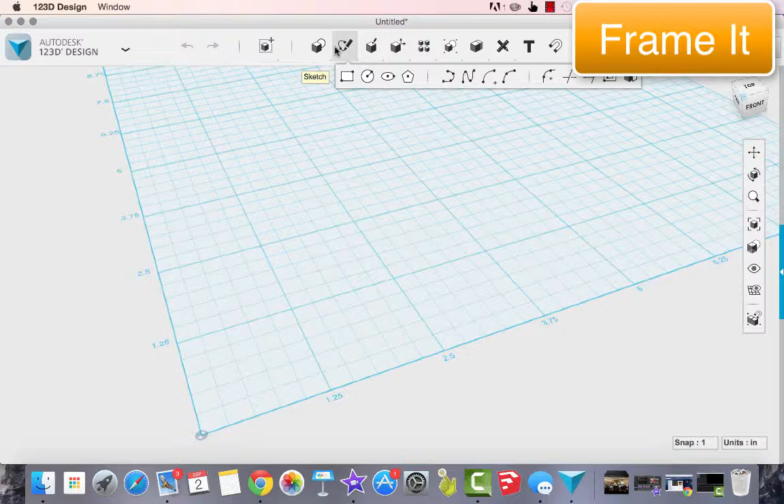So we want a 3.5" by 5" picture frame. We need a 3.5" by 5" picture. There we go. And not only that, but we need the exterior part of the frame.

So to do that, we've got the sketch rectangle, and I'll go a little bit wider than the picture itself. I'm going to go 2 unit squares off of here, so it's going to be a 4.5" by 6" frame.

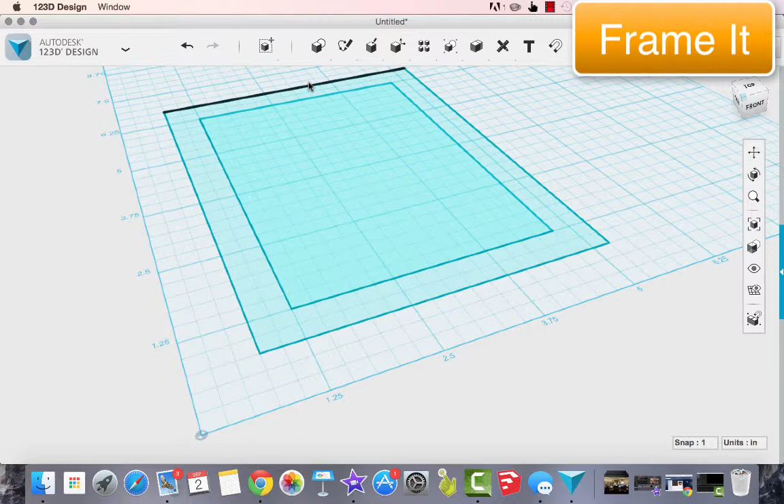Okay, so taking a look here, we've got that, and we've got our picture, we've got the frame.

Instead of 2 dimensions, let's go ahead and make this 3. I'll take this, and it's going to go up 0.75 inches.

Actually, it's pretty thick. Let's go ahead and go down to a 1/2 inch. So we're going to go 1/2 inch on the frame.

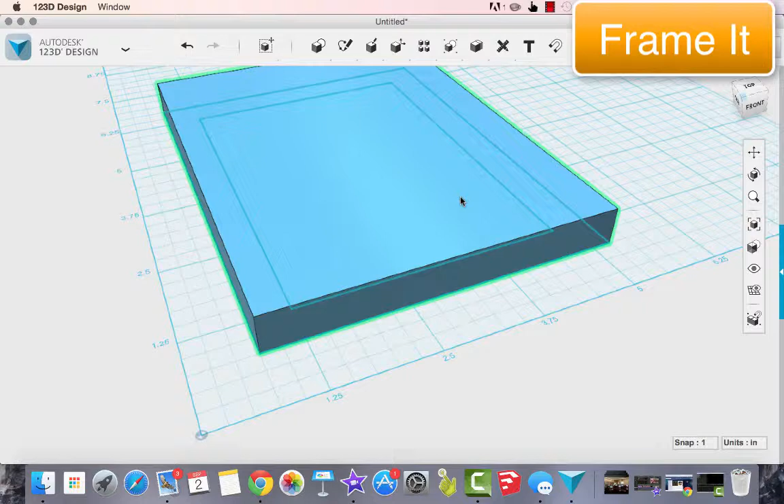And now I need to be able to make this an actual picture frame. Right now it's just a block that I can't do much with.

So I'm going to flip it underneath, and I'm actually going to give myself some cutout. What I mean by that is the picture frame needs something to rest on, so there's a little inlet that I'm going to create.

That's going to be a 1/10 inch by 3.5. A 1/10 inch by 4.9, since I've already taken off a 1/10 inch.

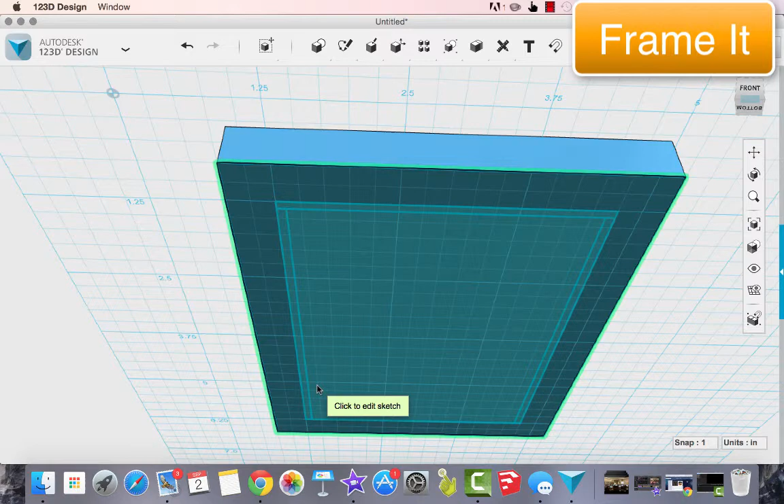And I'll do that all the way around here. 1/10 inch by 4.9, and there we go.

1/10 inch by 3.3, since I've taken off a 1/10 inch on each of the sides. There are multiple ways that you can do this, but this is how I'm choosing to.

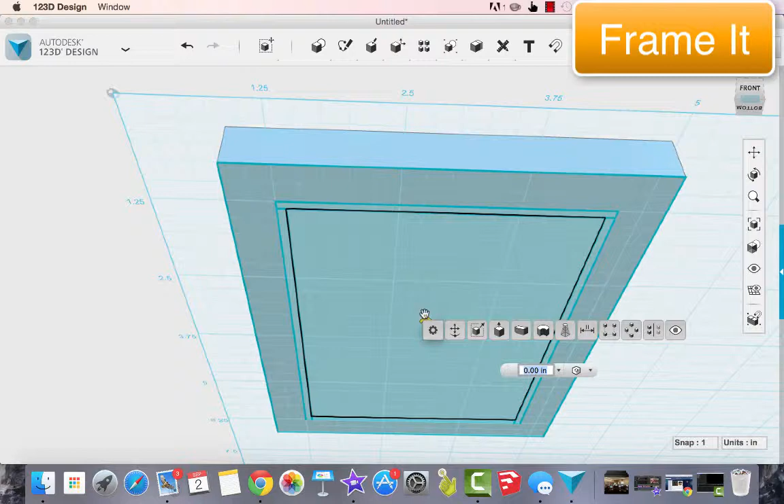Okay, all right, so it's ready to go, and I need to make sure that I select it carefully and extrude. So I'm going to extrude this all of the 1/2 inch, so it cuts it all the way out. Okay, and no more interior.

Okay, now the problem with that is that there is also no way of resting the picture.

So to do that, we can extrude those pieces that we had created, and I'm going to extrude them 0.2 inch.

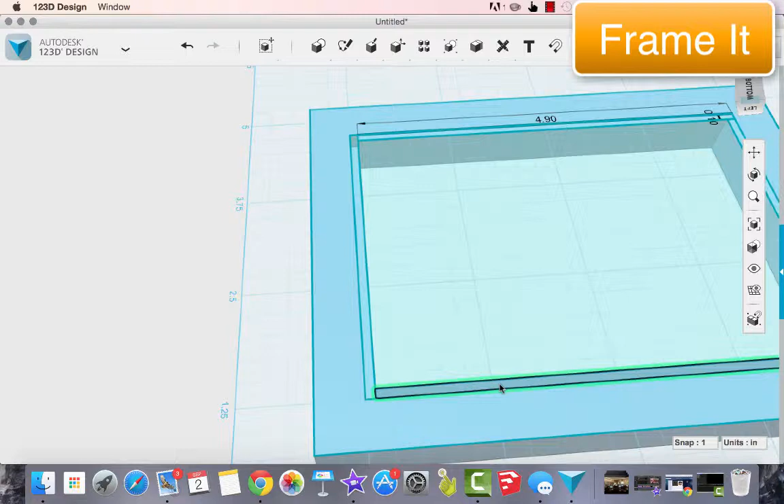And it's going to be a little bit challenging, but you can take it and move it down 0.2 inch. Notice that that red there is showing up, that means that we're cutting away instead of building up.

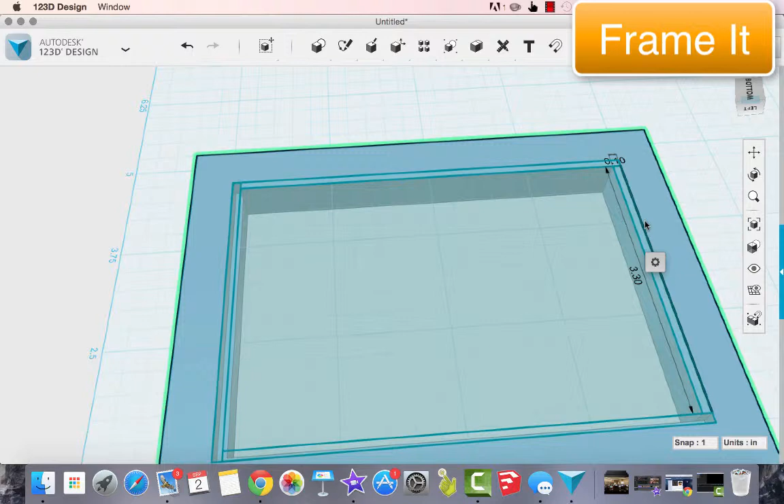There we go. Bring this down 0.2. Now if you take too much away, it's going to sit in too deep, and you'll have a lot of wiggle room. I found that 0.2 inch is sufficient.

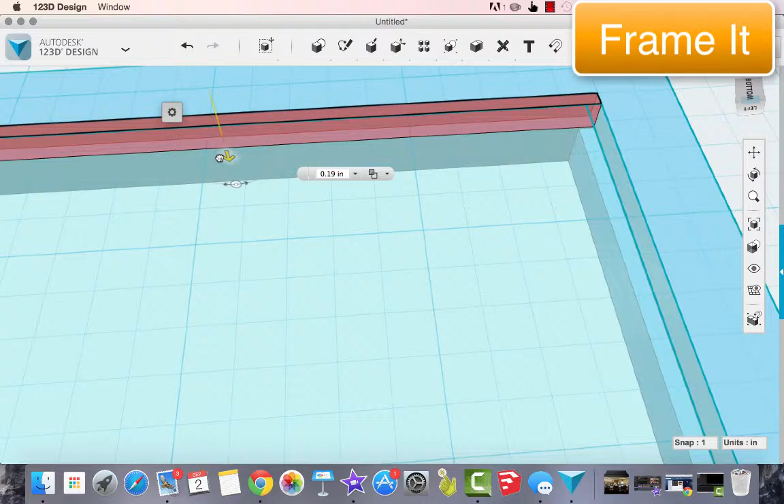There we go. Then I'm going to delete all of the extra pieces. I don't really need these anymore.

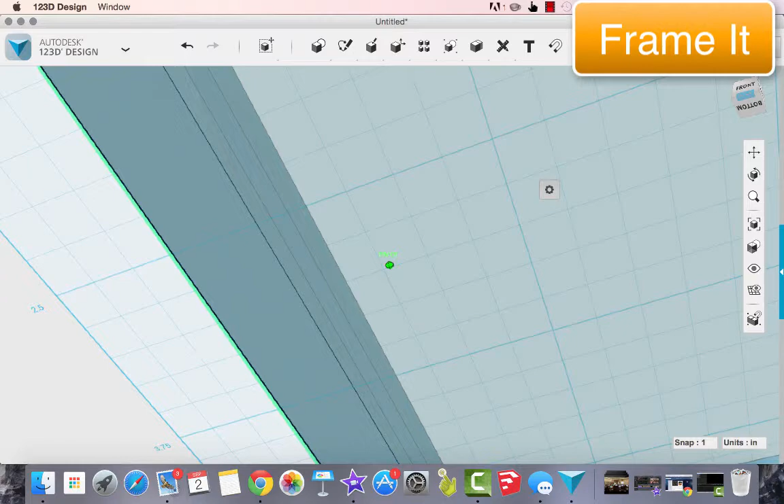Okay, so looking at it here, we've got a picture frame. So deleting out all the scraps, take a look, very basic, but a picture frame no less.

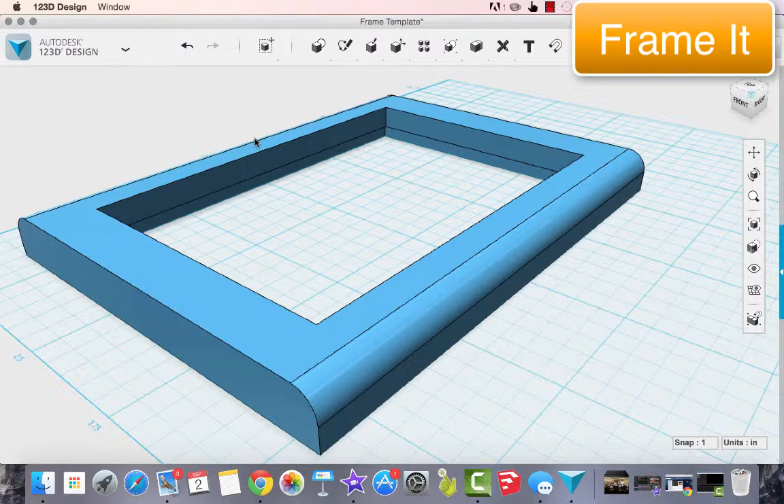All the way around, hopefully. Sometimes Autodesk can be a little bit finicky.

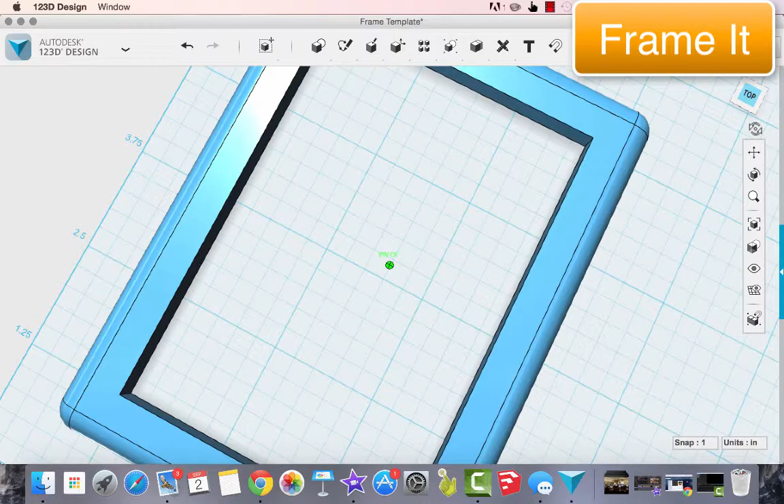So now looking at it here, I've got a picture frame. Remember that we want to create a unique frame. This is pretty basic, pretty bland as it is right now.

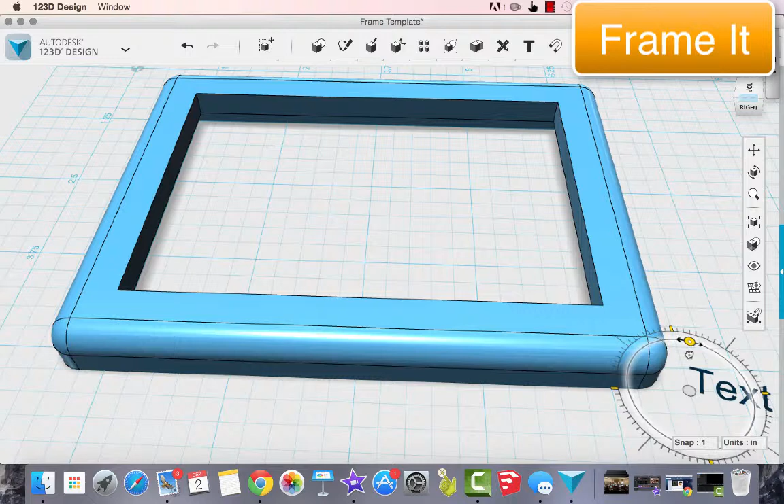So to add some flair to it, we can add text. This is probably one of my favorite parts of this. I'm going to click on the text button, and I'm going to start at the very bottom here, and you'll see why. I'll zoom over so that you can see it, and I'll hover over top of the edit text here and change it.

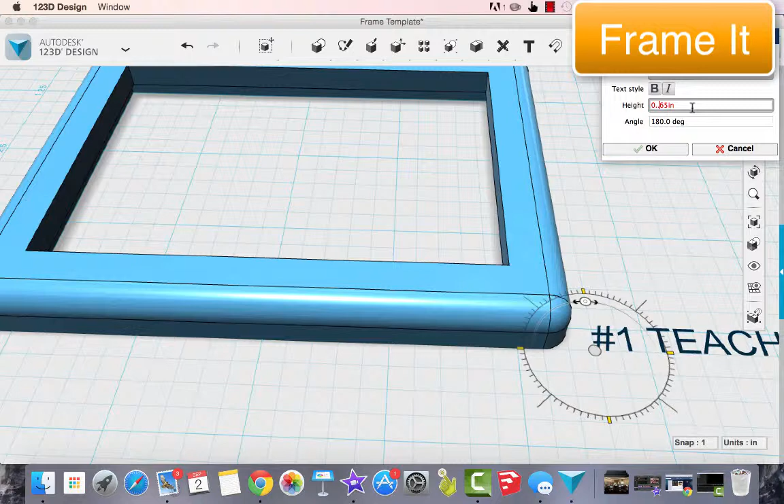Got some text there. We can change the height of this. Make it bold. Change the font.

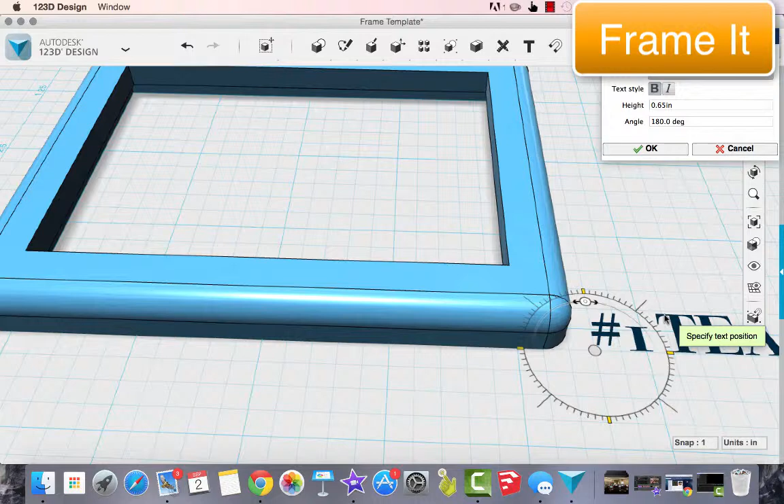Notice that if you choose some of the fonts that show up as rectangles, what that means is that it's not supported. What you want also is something that is going to be thick for a nice solid print. Like this right here has a pretty thin line. It'll print, but it's not going to be very sturdy.

Something like this here. So Cambria is nice. If I go ahead and click on OK, and now we're going to...

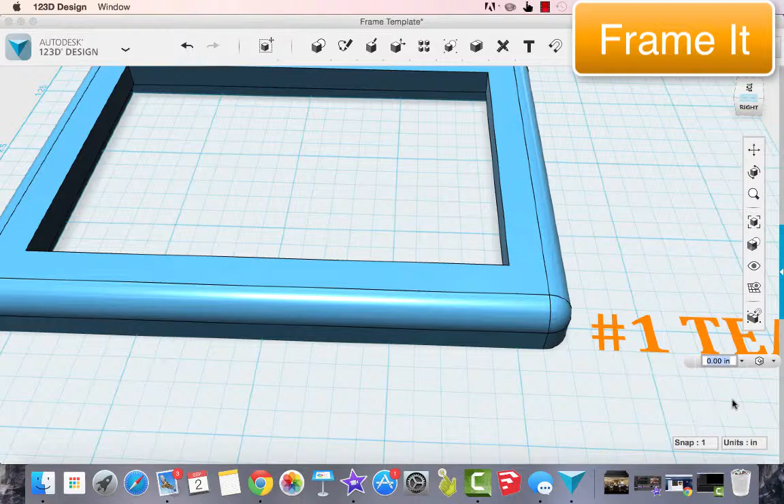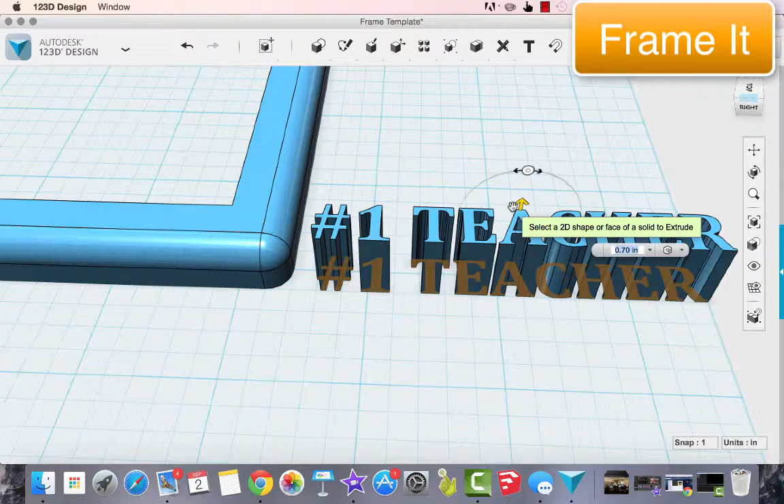Extrude the text. Let me move this over a little bit so you can see it. We're going to extrude it up. Remember that we went up a half inch, so we want to be able to have some extrusion above this. So I'm going to go up 2/10 of an inch above the frame.

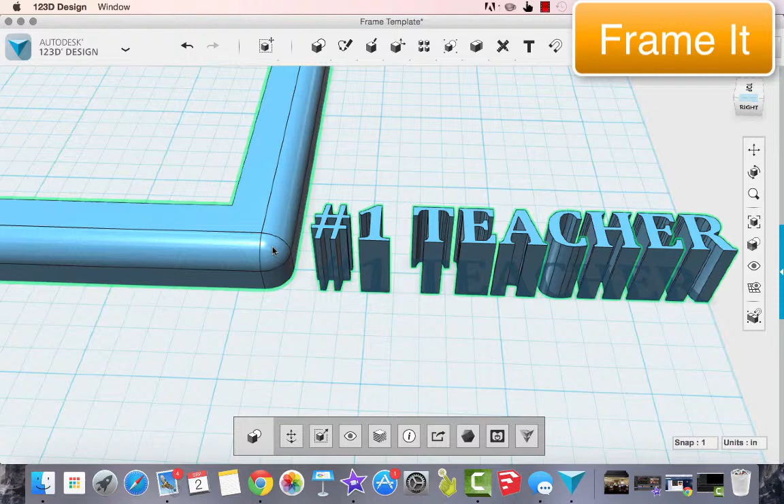And now each one of these is its own piece. So I need to hold down, on a Mac you hold down the command, on a PC or a Chromebook you're going to hold down the control. I'm going to select each one of these, and now it's time to move them.

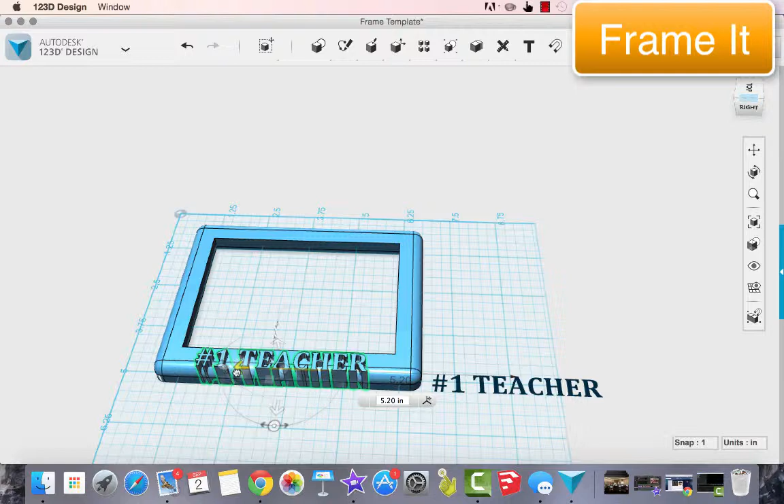I'm setting it up here so that it makes it easy to move. Take a look here. This is where I want it. I can mess around with it a little bit. I actually want it up, so I'll take it and move it up.

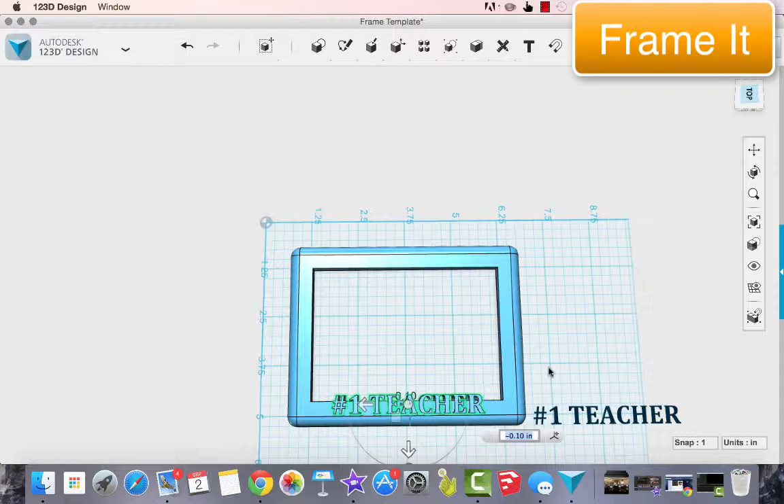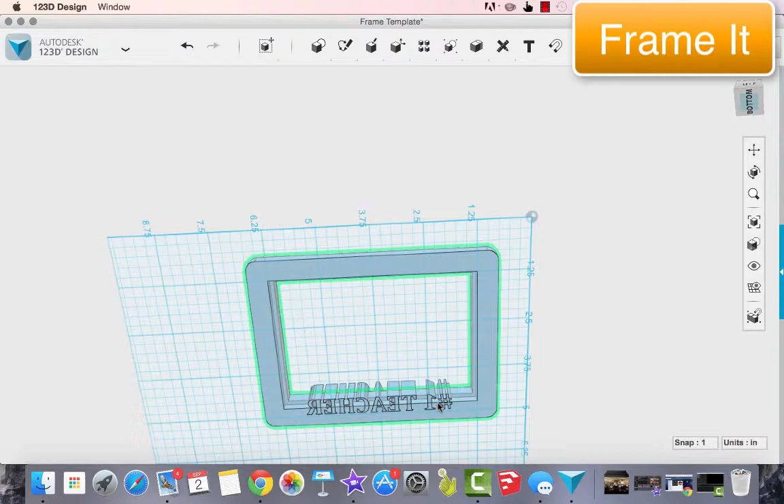Delete out the text that we originally put in there. And some would say, cool, we're done. Well, actually we're not, because what we just did was we added a bunch of text to a frame that's all in 3 dimensions. If you look at the bottom of the frame, it's sticking out, and so you're not going to be able to put a picture in there because you have text in the way. One trick to avoid that is by deleting it out.

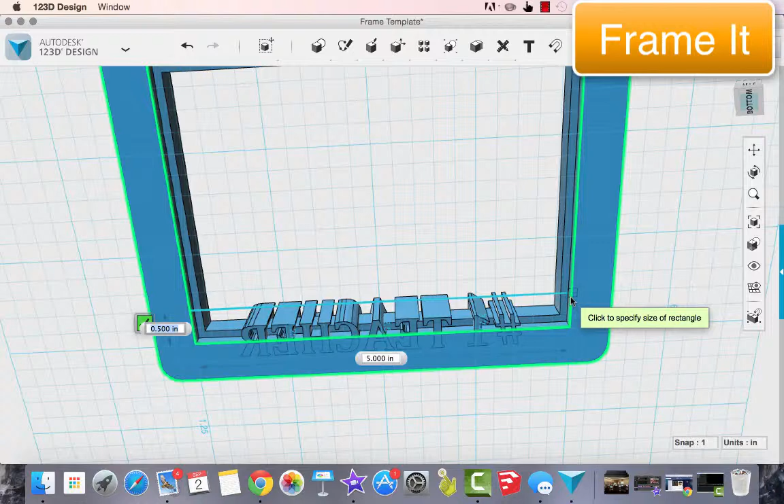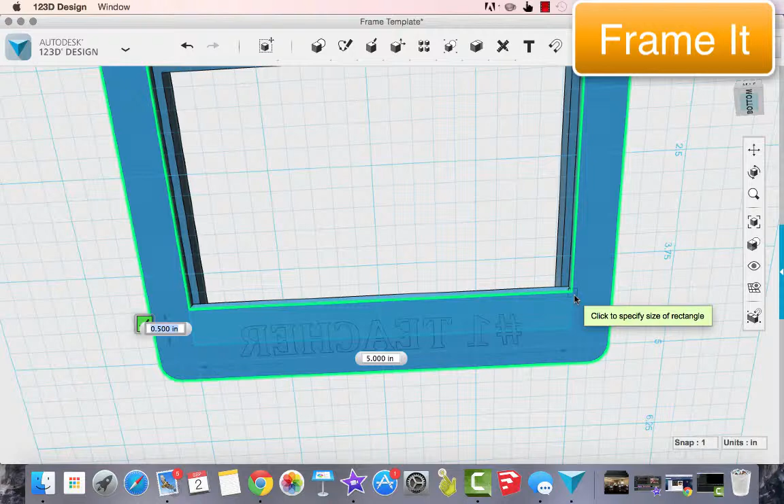And to delete it out, I'm going to go ahead and create a rectangle, and extrude 0.2 inches, and create another rectangle right over top of it, and extrude that one. Be careful not to extrude too much because you don't want to extrude and delete out the text.

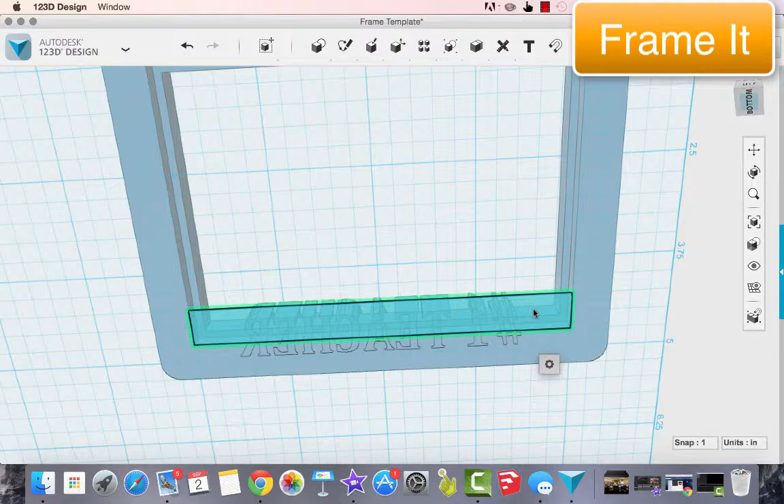But once you're done, you can delete all of the rectangles, and notice here that you have a place to rest that picture. Pretty cool stuff. You can see here, make sure that you check out all of your angles, make sure that it's all good.

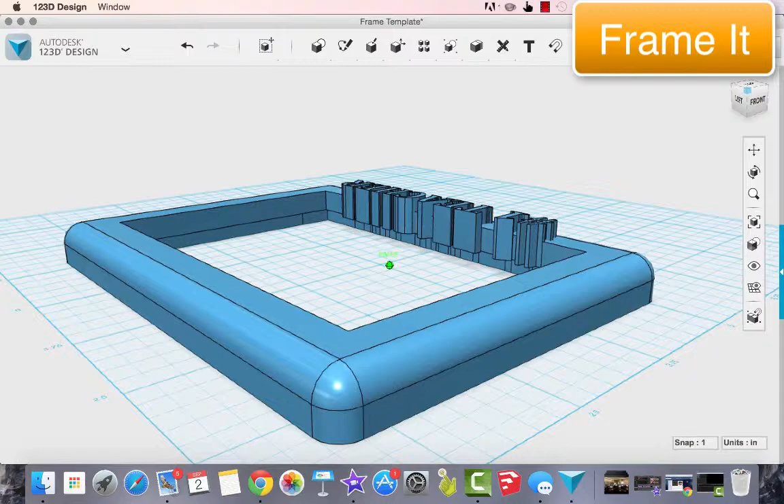Everything's clean. And to finish it up, it may be helpful when you print it out on the printer using MatterControl, you will get some drooping here because you're not going to get support created. You'll get support created if you choose to do that on the letters, but not on the frame itself.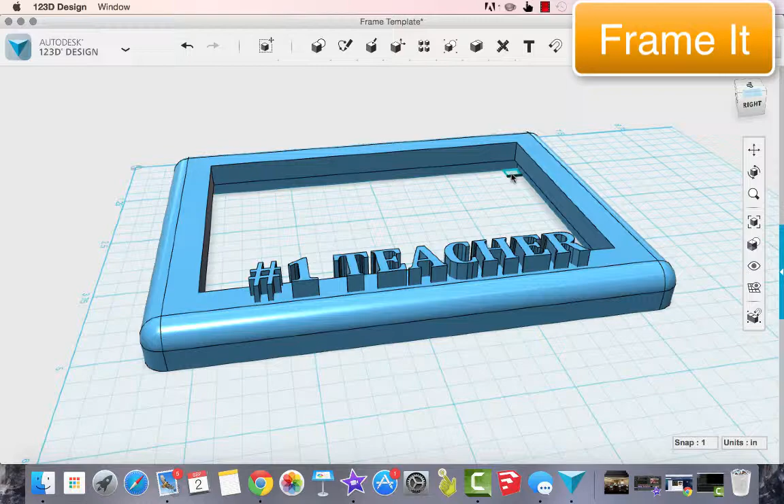So what I did was I actually went in and created a support that was just short of the frame, so that way I could break away when the print was done. So I can go up here, and I know it's 0.2 inches, so I can go 0.18. And notice you've got a little bit of a gap there. I would do that all the way around just to make it a little bit easier for me to get a good quality print.

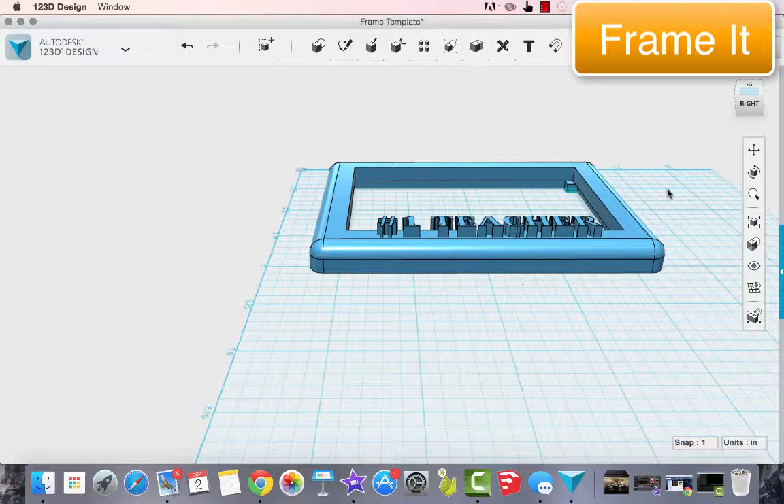If you don't put these extra little supports in here, you're going to get some sagging, you're going to have to do a little bit more sanding or fine tuning and refining along the way. But this is how to create a frame. Hopefully this helps, and good luck.